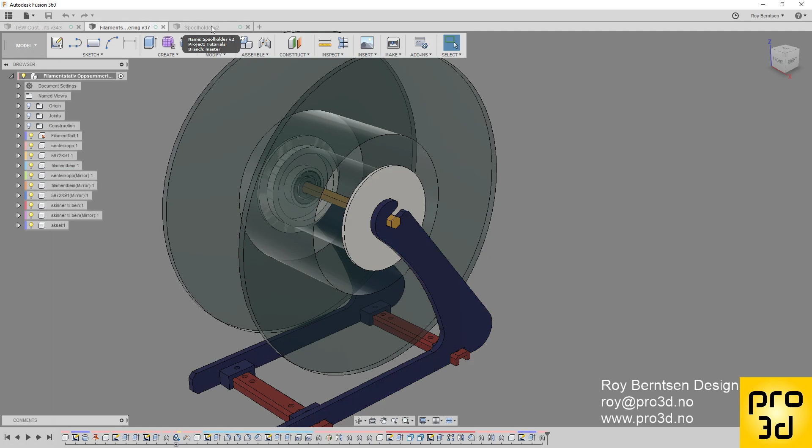So let's dig into our design and start a new component, leg A, and activate. Click on the center cap and hit create sketch.

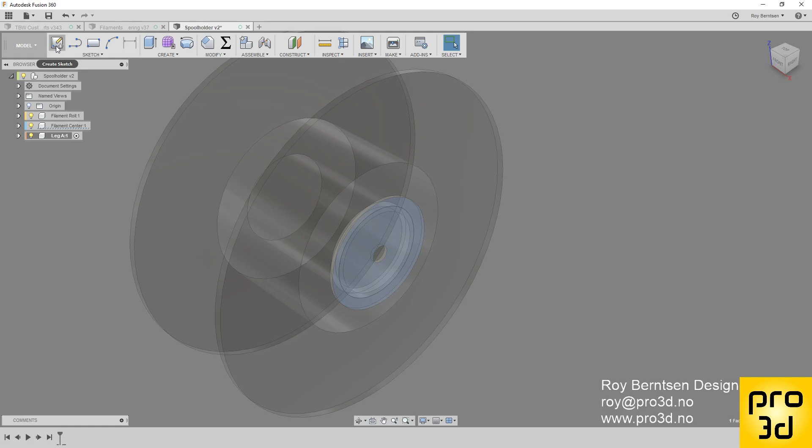P on the keyboard, letter P for project. Click the center cap again, OK, and hit C on the keyboard for circle. While active,

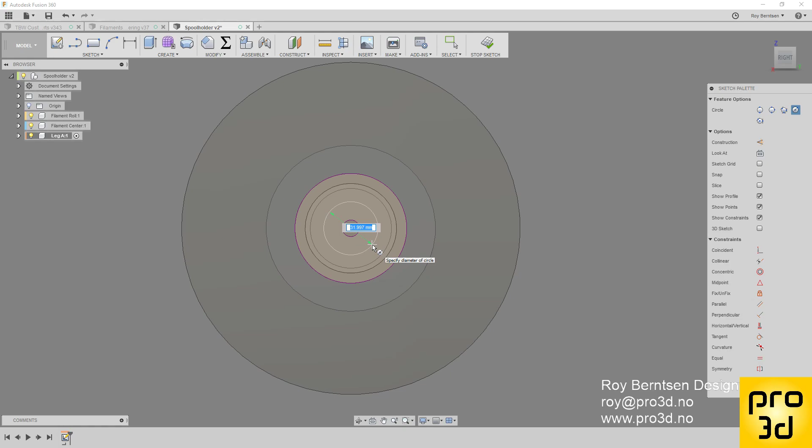Add dimension. I'm going to use 25, use whatever you want. Hit L on the keyboard for line. Start on the circle.

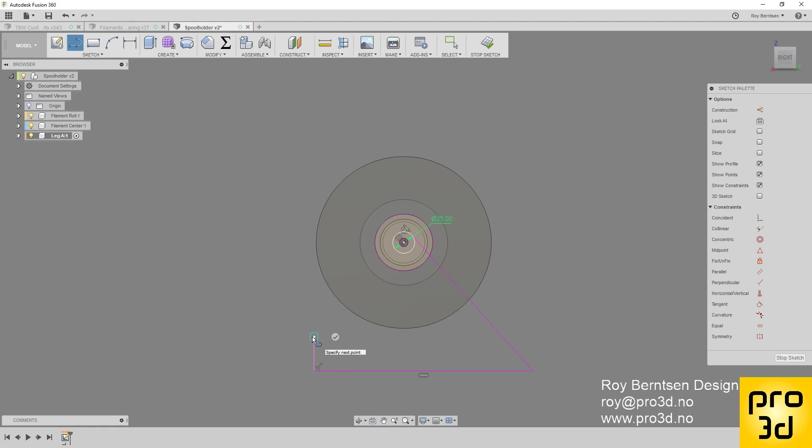Use arrow on the keyboard while in line mode. Go down to the right, click. Go to the left, click. Go right up, click, and go right, click.

Find a 3-point arc. Start from the circle, go down to the last point on the line, and just up and click.

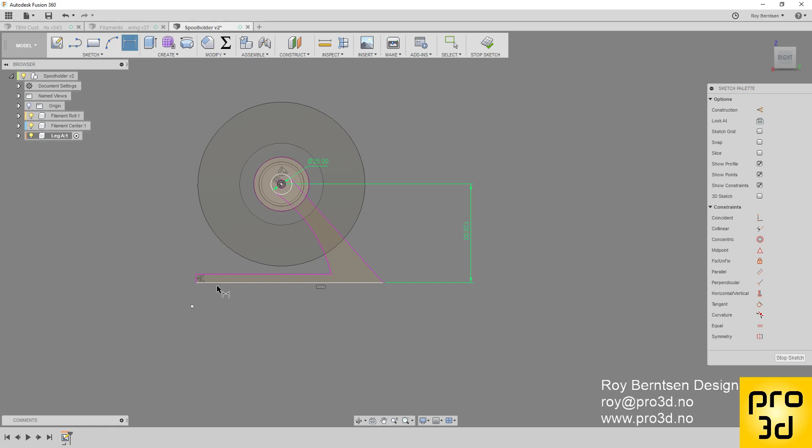Add some dimensions. I'm not going to tell you, just watch and do whatever similar to this. Let's do 120 over there. Let's do 15 over here. Let's do 110 out here. Then just do 60 here, about 60 would be good. And then arc 175.

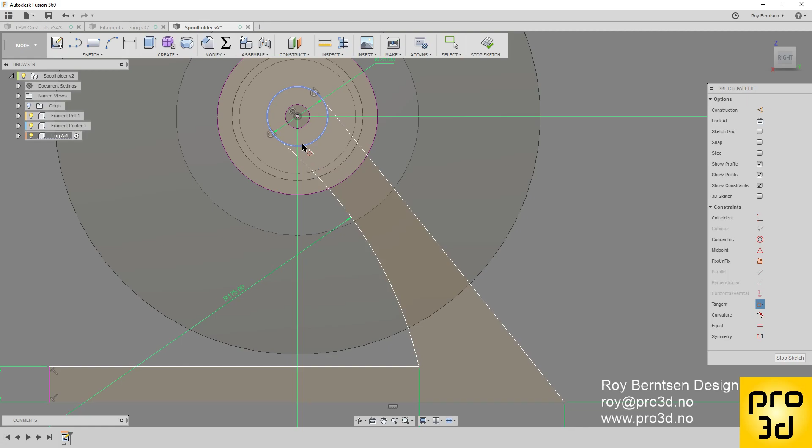And we need a tangent constraint from the arc to the circle. There's one more we need over here. We need this one to be 200, about. Stop sketch.

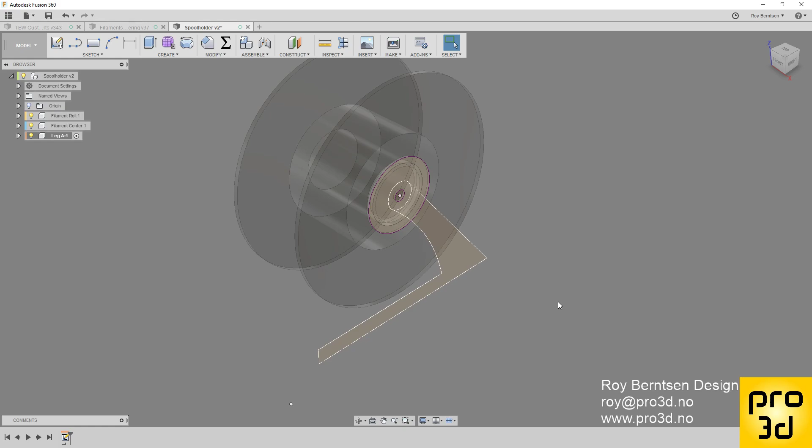Hit E for extrude on the keyboard. Select these 3 profiles and extrude 4 millimeters.

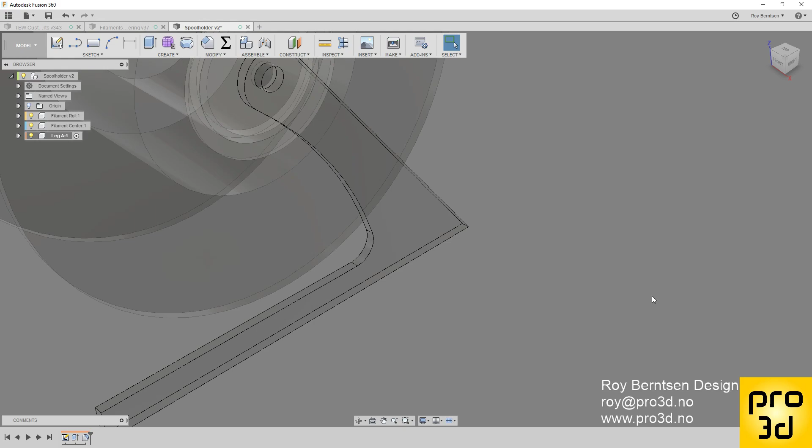Hit F for fillet. Do a 10 millimeter fillet inside. F again, and do one outside. Let's say 15. That's fine.

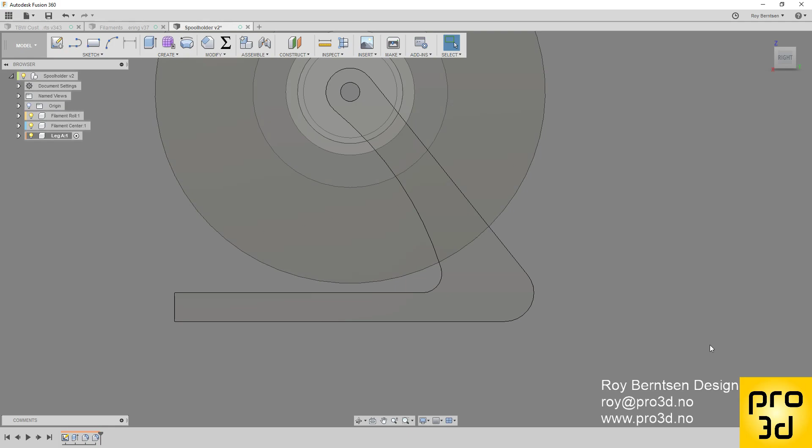And we need to make some profiles to extrude some slots or whatever. So let's click on the leg and create a new sketch. Hit P for project, click on the leg, OK, do a rectangle, and let's do that 10 by 20.

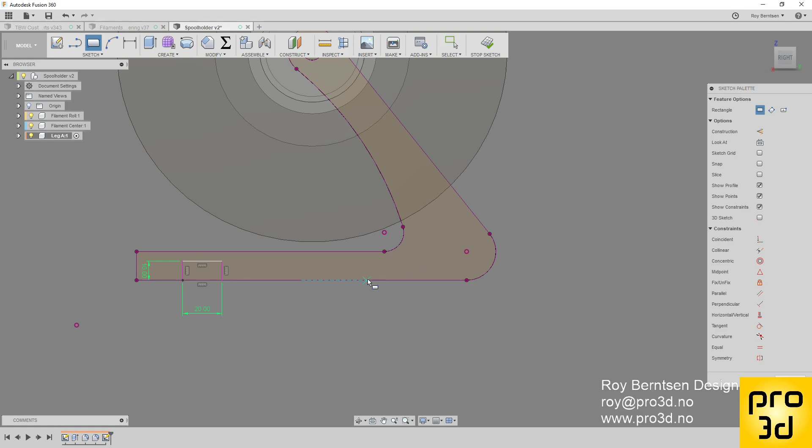One more over here somewhere, 10 by 20.

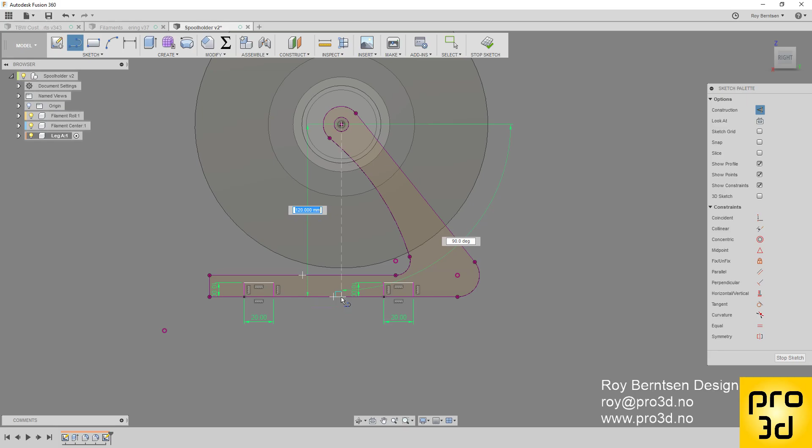Let's use a center line, L for line. Let's do a construction line just from the circle center and straight down. Let's add a symmetric constraint between the rectangles and the center line. And let's do a dimension.

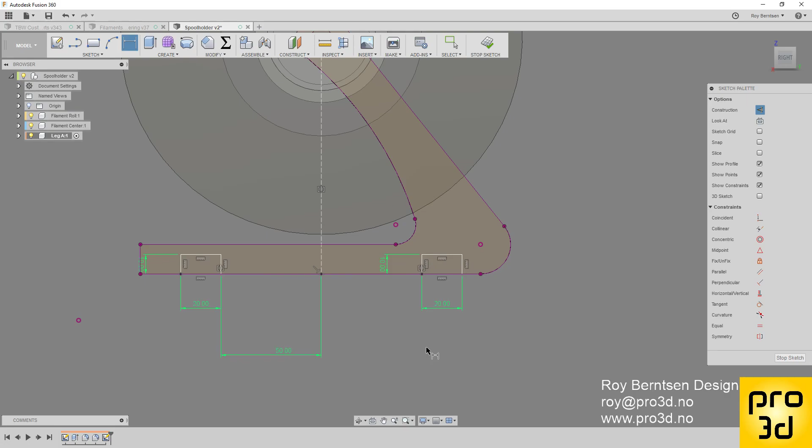Hit D on the keyboard. Let's do 50 here. And we need something inside, so let's just do 3 lines, normal lines over here.

I'm just going to stop there, and I'm going to do a constraint by the point and the line, and D for dimension. Let's add 3 millimeter.

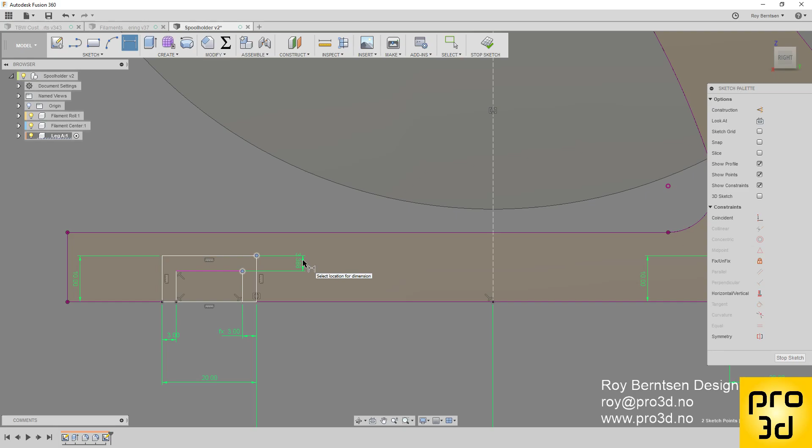Let's do the same over here. Let's just use the first one. Click on the first one, and then from this corner to that corner and out to the right, and use that one.

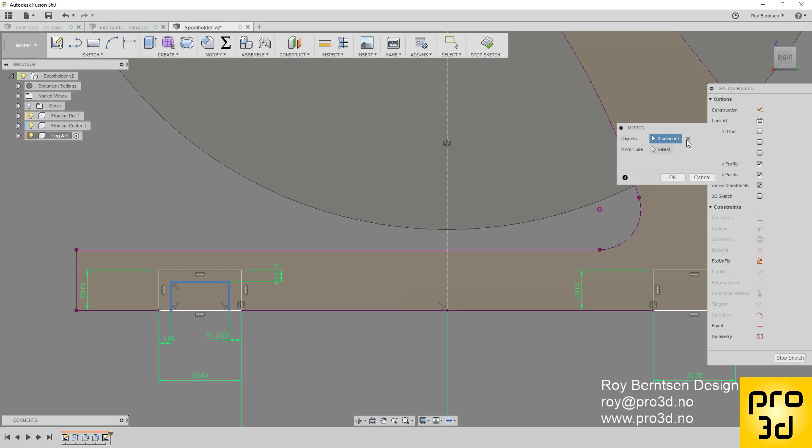And we're going to mirror these 3 lines, so just hit S for search or sketch and type in mirror, enter. Click the lines you want to mirror, select center line, and OK. That's what we need now.

Stop sketch. Hit E for extrude. Select this profile, that profile, and just drag it through. That's fine.

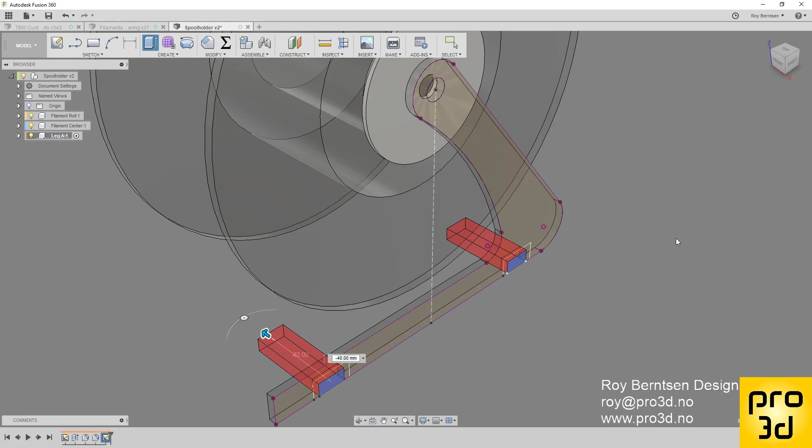Get back to the sketch. Hit the light bulb. And we're going to extrude these profiles now. Extrude again. Choose these 2 profiles and drag it out on the other side, but change from cut to join.

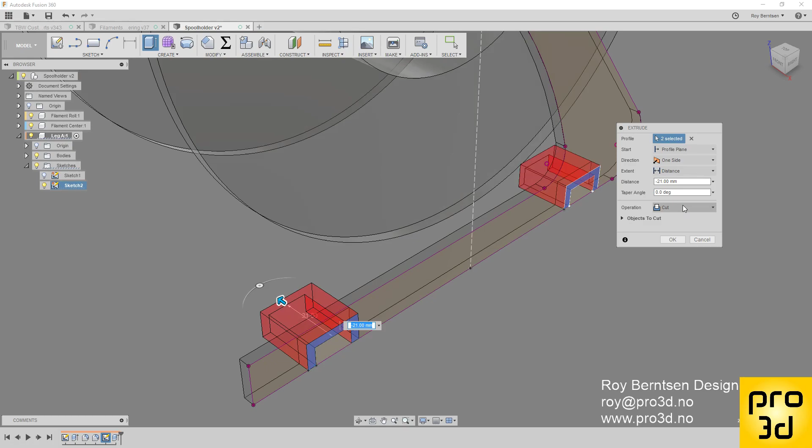Go from the front view to have a look, and we need to go 4 and then 10, so 14 in all. It's going to be minus 14. That's fine.

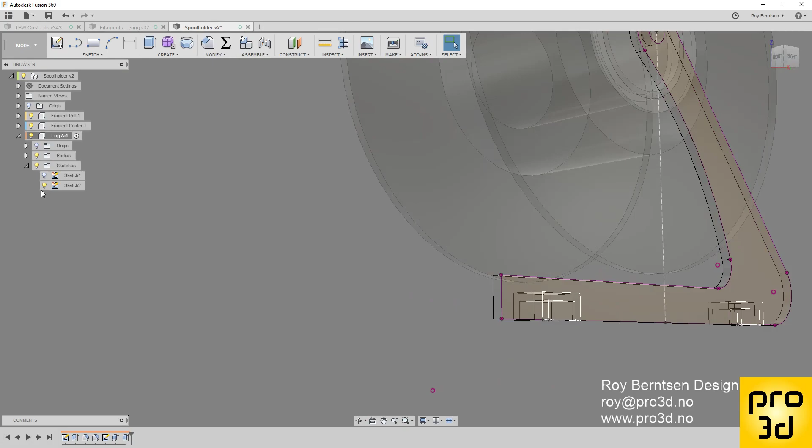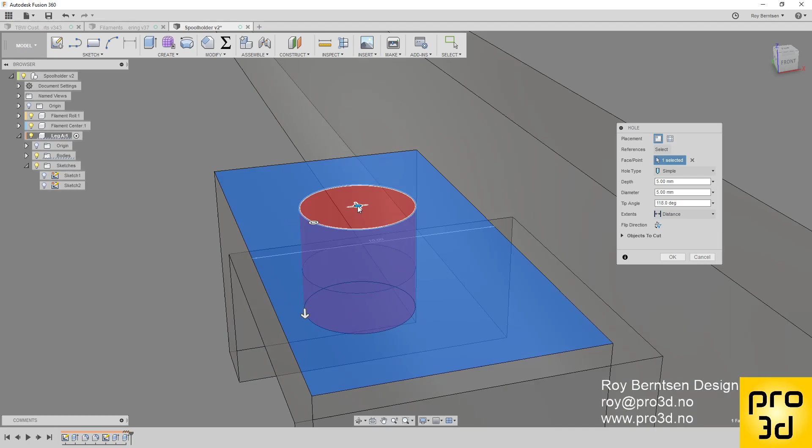Turn off the sketch. And we can add some holes. Let's do that from the top. Hit H key and click the top plane over here, and just drag the center towards the center. You will find a point. It will snap to this point, and just do a 3.5 millimeter hole over there.

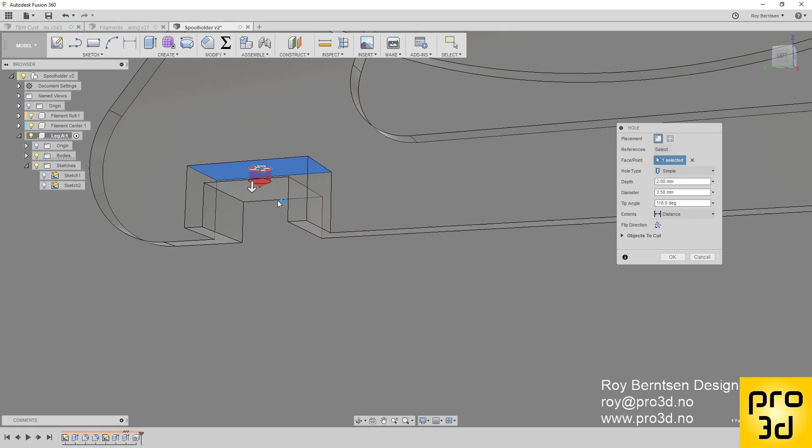Do the same in the front. Click the plane, hit H key, drag the hole to the middle of the plane, and make sure it goes all the way through. That's fine.

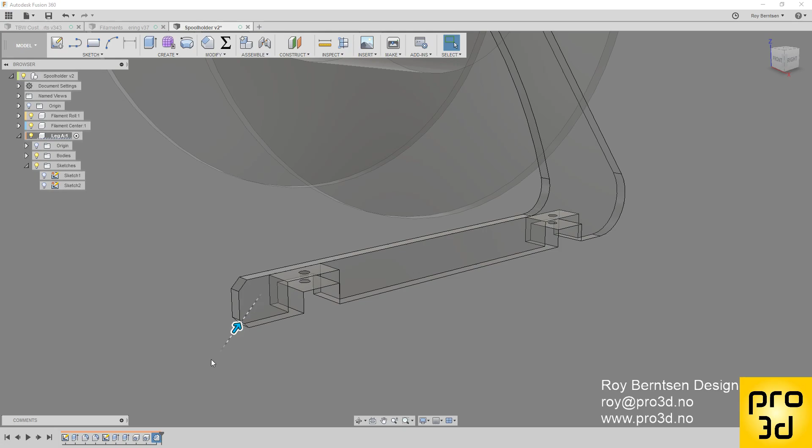Let's do some chamfers over here. I think 3 millimeter, maybe that's a little bit less. Let's do it 4. Let's do edit feature, go 4. Yeah, okay.

I'm satisfied with this leg. So let's just activate the top level of the design. Let's add another color to the leg. Hit A on the keyboard for appearance.

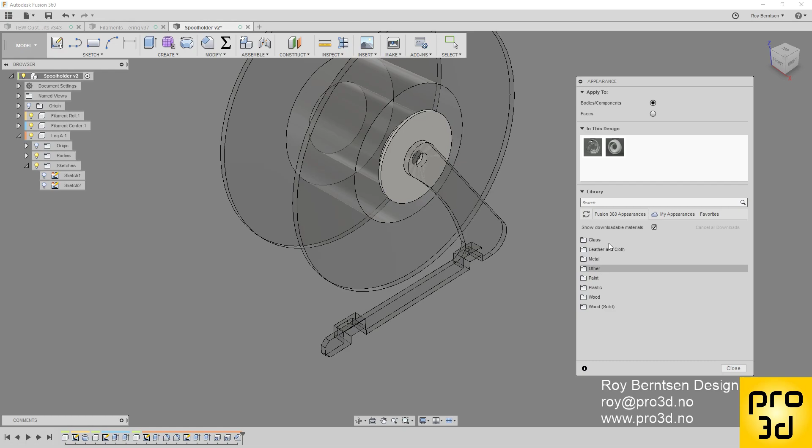Just find something you like. I'm gonna let's just use red for this one. Okay.

So that's the design of our leg, and I'm gonna keep these short, so I'm gonna end here, and I'm gonna show you the next step in the next video.